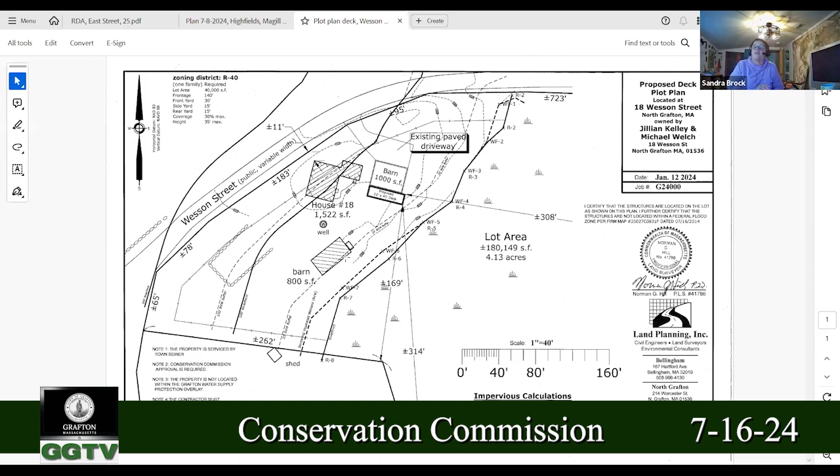I'll move to approve the minor change for— no, that's not right, 18 Wesson Street. Second. All right, we have a motion and a second. Roll call vote—Travis, yes.

And Jonathan? Yes. I am also a yes. This passes as a minor change.

All right, so we are at 7:19. Let us switch to our 7:15 meeting, and I need to go back to the lead sheet and do a public hearing for a request for determination for 7:15, and this is for 25 East Street. So pursuant to the Massachusetts Wetlands Protection Act and the Grafton Wetlands Protection Bylaw, Conservation Commission will hold a public hearing to act upon a request for determination of applicability for the removal of trees on the dam at 23 Rear and 25 East Street.

And who's here to speak to that? Good evening, this is Norman Hill from Land Planning. So, Jan, could you put up that sketch that I did? So, this property is located at 23 Rear East Street. And so East Street runs west to east, and it would be at the bottom of your screen. You can't quite see East Street. The garage is, oh, there you go. So East Street's at the bottom of your screen. So Hayes Pond is at the north end of your screen.

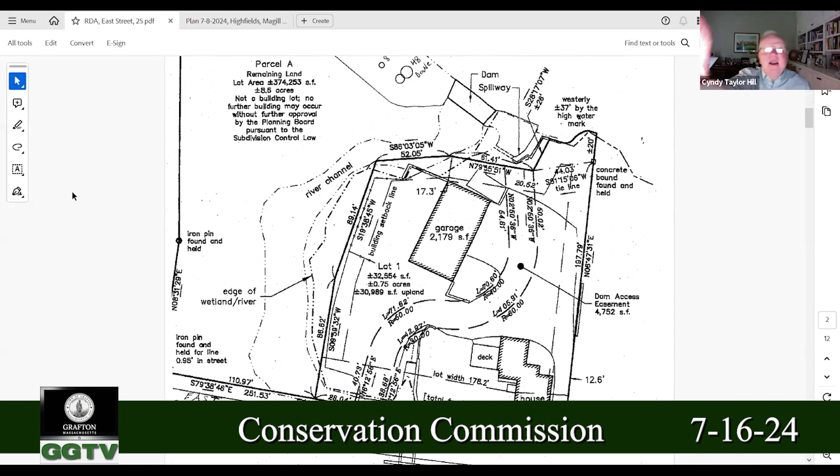So Hayes Pond, I don't know, I'm guessing it's maybe about a 10-acre pond. And there's a dam that holds it back. And so to the bottom right of your screen is all earth, and there's a garage and a house, and it's high ground. And then there's the spillway, concrete dam spillway. And then there's this dam that runs sort of to the northwest. That dam, I would estimate to be about 80 feet long, maybe 15 feet wide at the top. The dam appears to go straight down at the pond side of the dam. And on the downhill side of the dam, it's probably a 1-to-1 slope. It goes downhill to the river and to the BVW down below.

Now, there are trees growing on this dam, so I walked this dam and I've put a circle each place where there was a tree. There's a couple of large trees. There's a 42-inch tree and there's a 48-inch tree, a 36-inch diameter tree. These are big trees. I imagine they've been growing maybe more than 40 years, some of them. So I've shown every tree that's growing on that dam. So my client has received an order from Mass Dam Safety telling him to cut all these trees down. Trees can compromise a dam if the root bundle gets too large. The critters get in there and it could compromise the dam.

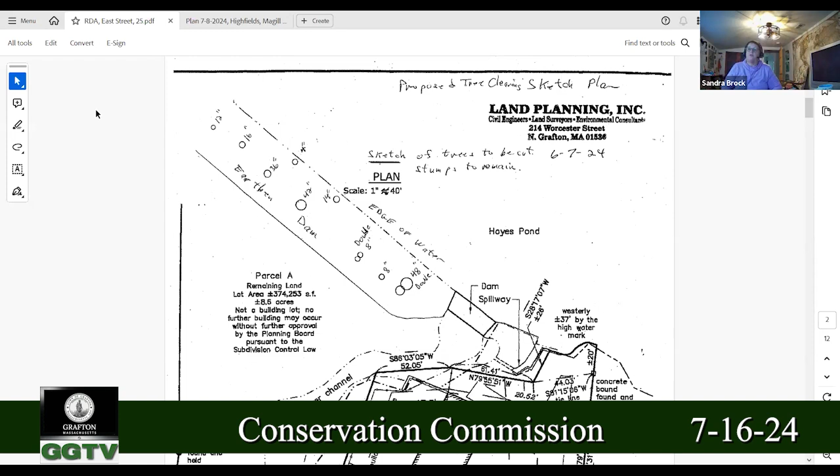Okay, so that's great. Obviously the commission isn't going to say you can't remove these trees when it's a dam safety issue being requested by the state. I don't think any of that's a problem, but we've gotten a lot of feedback from different people with a lot of questions. From my perspective, it's really just making sure that it's done correctly. Now, this is kind of a dam safety issue, so it's not really our purview per se, other than the location of it, which obviously you can see here, and you've already mentioned it's within the 25-foot no disturb zone. I think the bigger question is some of the questions we received.

So why don't we kind of go through those and let you know. We'll start with DEP comments, which Jan, we just got them the other day or so recently.

So I don't know if you received these yet. Their questions had to do with the kind of equipment that would be used to access the area to remove the trees, and whether the trees drawn on the plan are the only vegetation to be removed. Is there any undergrowth or anything else?

Typically, projects proposing removal of vegetation like dams require the root system to be removed, and we'll talk a little bit later about long-term vegetation management. If long-term or continuous vegetation management is possible, that's something we could include as a condition in the NOI for long-term management. I guess another question is, will dam safety be agreeable for the stump remaining?

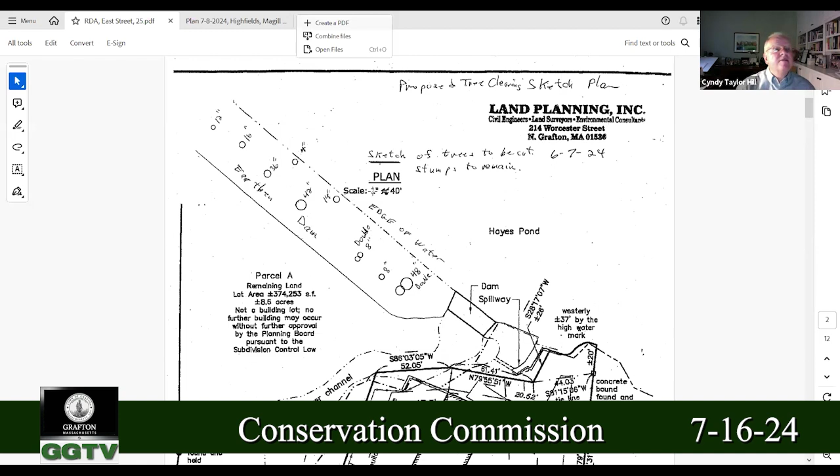All right, Jan, as far as the order of where we want to take things, does it matter? Do I just start at the top? Yep, we can keep going down. Okay.

So this next one is at Highfields, which means Travis, are you going to recuse yourself? I'm recusing myself. Water break? Yep, no problem.

All right, so that's fine. So I will read that in. Excuse me as I move my cat. Sorry, sorry kid. All right, so 42 McGill.

Pursuant to the Massachusetts Wetlands Protection Act and the Grafton Wetlands Protection Bylaw, the Conservation Commission will hold a public hearing to act upon a request for determination of applicability for tree removal at 42 Magill Drive.

And who's here to speak to that? That would be me, Byron Andrews, DiPrete Engineering. All right, you have the floor. Okay, thank you. So if you recall, there were some trees removed by our client, Magill Associates, in an area where they want to loam and seed.

They want to move the golf course further to the right from where it is now. The reason for doing that is they have two building lots that they're developing, and they want to ensure the safety of the future residents by moving the play area further away from their lots. They were not aware that they were as close to the wetlands as they are. So it was determined that we should apply for an RDA for that work.

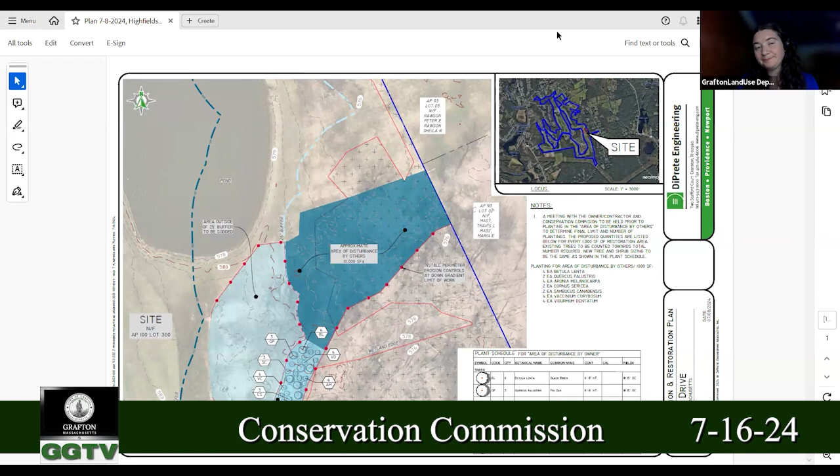Do you want me to make a motion now, Sandy? Yes, please. And we haven't heard anything from the public, Jan? Nothing from the public. Okay, I'll make a motion to close the hearing and issue a negative determination with the conditions that were read out loud prior for 42 Magill Drive, Highfields, tree removal.

All right, and I will second that motion and we'll do a roll call vote. Same thing again. Jonathan, yes. Travis, recusing myself. And I am a yes. So that passes.

At this point, other than that, I would ask Byron to follow up with Jan and Leah about having Art Allen go out when you want to do your plantings. That actually is, I appreciate that recommendation that you made because it makes it much easier for us. And he's the right person with the right background to do that.

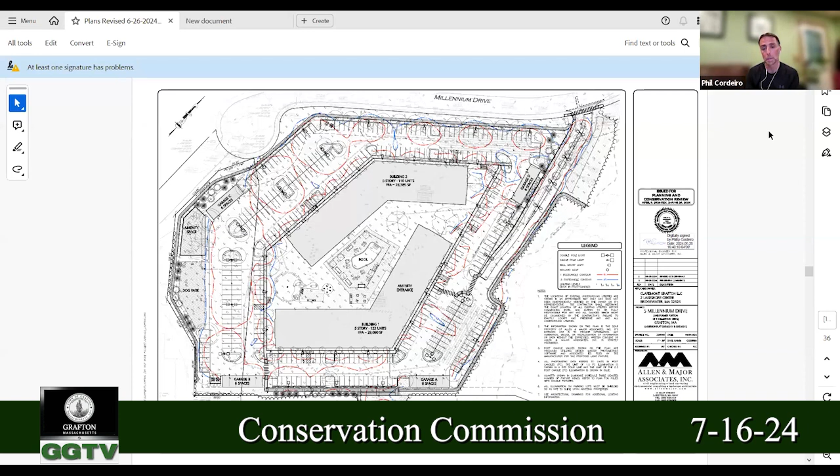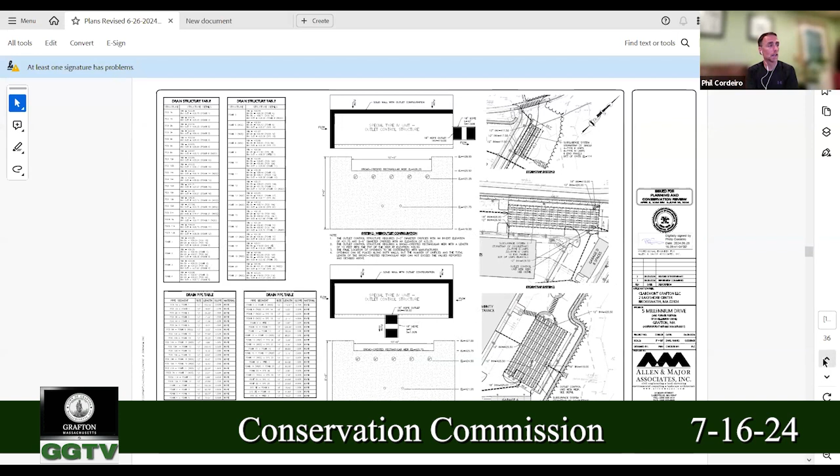Terrific, just getting it for the record and to be a little clearer on that process. Please go ahead and proceed. Could I ask you to back up a couple of pages on the plan set, Jan? I'm looking for the layout plan, which might be two sheets behind here. The layout plan is easiest to see the changes we've made as a result of the commission's comments. This is fine, what's on the screen right now.

When we met with the commission at the initial introduction to the hearing, we had proposed retaining walls along the easterly portion of our site due to the relative nature of the cut and fills. Some of those walls will be in excess of 15 to 18 feet. The commission asked us detailed questions about the nature of those walls, the constructability of those walls, and really to reinforce that we do not need a waiver from the 25-foot no-touch buffer that the town of Grafton has in place. We spoke at that time because we were holding one to two feet off of the face of the 25-foot wetland buffer. We had indicated that we could likely build those with no problems.

But we took the commission's concerns to heart, and we went back and met with our construction team. We also met with the retaining wall manufacturers and reviewed the necessary build areas they would want under ideal circumstances. What we've done here is the entrance to our site, which comes in the upper right corner of the plan - it comes into the site, and we've tucked it a little bit tighter in towards our buildings.

You can see the curvature right as it enters into the parking field. But what that has allowed us to do is pull everything about 10 to 15 feet away from the 25-foot wetland buffer, which has afforded us an opportunity to have 6 to 8 feet of ground clearance from the face of the wall at the lowest course of the retaining wall to the wetland buffer.

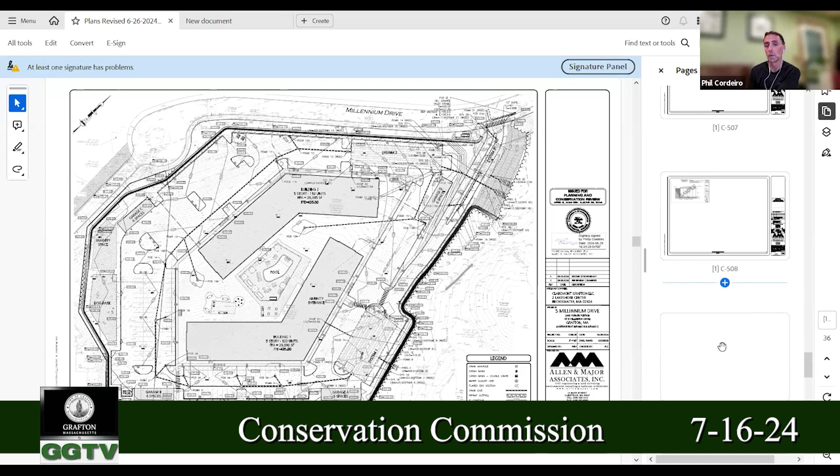They are schematic illustrative cross sections of the proposed finished grade relative to the retaining wall elevations, and certainly the elevations of our stormwater systems located below or adjacent to the retaining wall, to the back of the retaining wall. And we'll see as those come up.

So just one quick question is - please - that you shifted the wall and you described generally it's based on curving the driveway in and so forth. Yes. About how many linear feet of wall, and I'm not looking for an exact number, shifted?

So we ended up actually moving about probably 250 feet of linear wall. I apologize, I wish I could point to it for you on the screen. But basically...

Where, if you're looking along the driveway on the image that's on the screen right now, there are 4 light poles that are centered in the median. From about that point of the 4th light pole, along that entire stretch of the driveway to where it encounters one radius and then a reverse radius as it approaches the parking field, that amount of retaining wall was adjusted to better the separation. Okay, that's very helpful.

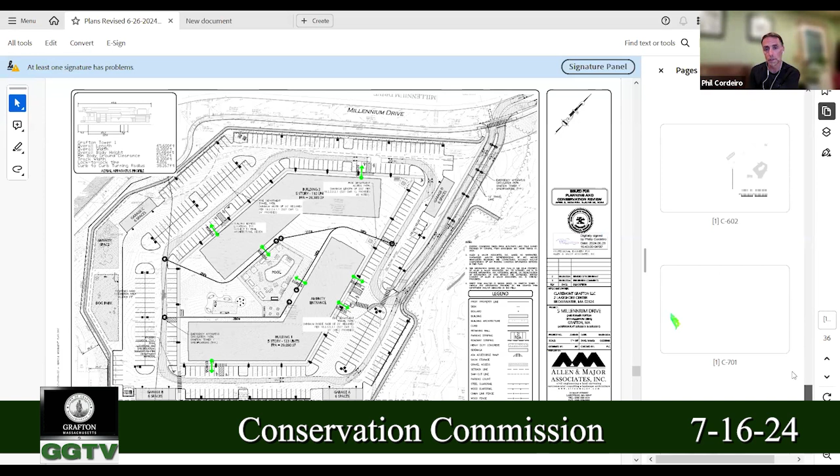Okay. Yeah, so, sheet C601 is the cross-section sheet, please. There we go. There you are.

Thank you very much. So again, on the left, very self-explanatory. Hopefully, I'm happy to walk through it, of course, for the commission. But the intent of these was to really clarify the relationship between the native grade, the proposed grade, the retaining wall solution, the drainage, and everything associative with that area.

And for some granular details, in the event the commission is interested in it, we are looking at doing a Redi-Rock retaining wall here, which is a large gravity block wall. So once we have the base course in place, then those wall blocks would stack up to make the 15, 18 feet of height that we need along this stretch of the property.

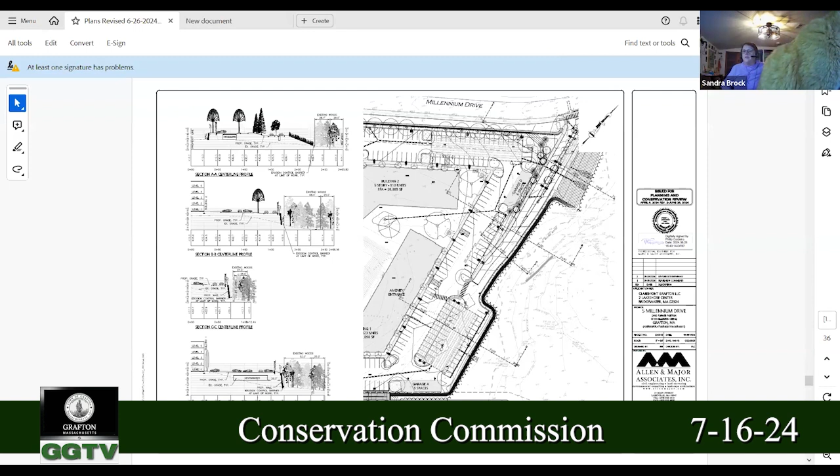So, Jan, if you could just zoom into the upper left-hand side, that first section going through there, and Phil, if you could just generally go through each one of them, just for the clarification of the commission and the public.

Absolutely. So the upper left section is the one closest to Millennium Drive. It does not have a retaining wall. This is the area where we have transitional slope to make up the grade. The darkest portion, the darkest lines at the top of the cross section represent the proposed finished grade of the site, with the thinner black dashed line below it representing the existing grade. And there you might be able to clearly see the amount of fill that will be going into the site to build up the plateau to support the buildings and the development.

The right portion of the cross section is the wetland resource area, along with the wetland resource area buffer line. It's designated by those faded trees, just to give you an indication as to where the wood line would remain and where the buffer zone would remain completely intact. The darkened slope, between the proposed and the tree line, represents that transitional vegetated slope that we are proposing.

If you could just pan slightly to the right on the page, you can see clearly where that slope line is, where cross-section AA runs through. You can see all the lines sort of directly below that north arrow. That's the slope that we're depicting in AA.

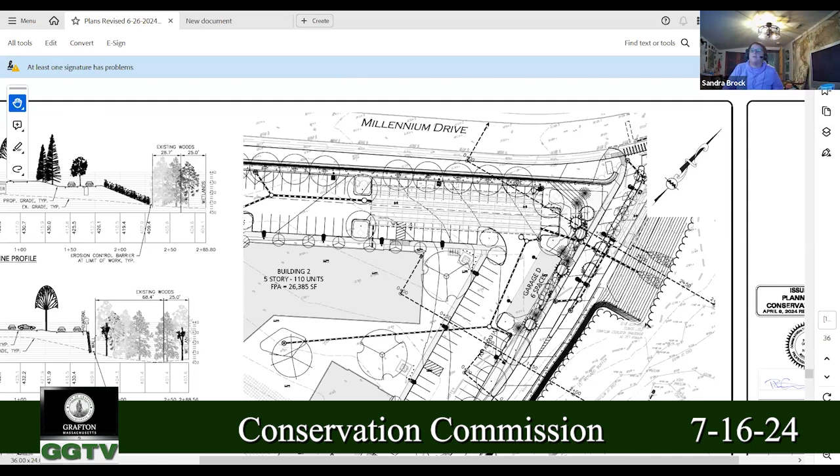If you go over to the top section, and I wish I could mark this up to explain it, there's a manhole right underneath that car. If you go over to the right, to the car on the right, there's a box there—that's the manhole, I'm guessing.

Yes, then what you did is instead of coming up high on the slope, you're coming down lower so that it's more of a flat area as you come out. That's correct. It enables us to keep that discharge pipe flatter and the riprap dissipator flatter still. The combination of those two is the velocity dissipation we're going for.

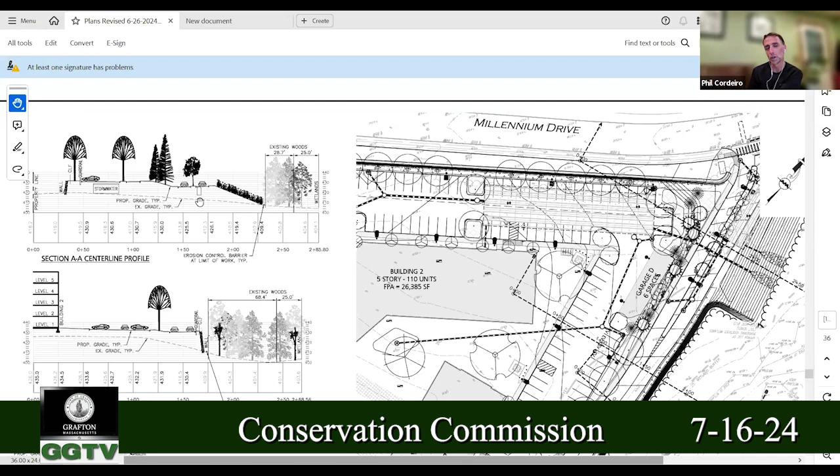And the reason it doesn't show in the section is because the section line is in between those two pipes and those two discharges. That's exactly it—we could try to draft it in, but then astute commissioners might say it's not exactly on the section line, so how do we believe it? That's why it doesn't show up on the line. Yeah, you're right on top of it.

And then going to the next section line, if you want to do a quick description of that—this is an area where the retaining wall moved. Yes, so that's exactly right.

You can clearly see on section BB, again the same general premise: proposed on top, existing on the bottom. The darkened near-vertical line is the retaining wall we are proposing, represented by the thick dark line on the right side of the screen. This one has a very deep woodline section before we even approach the 25-foot resource area buffer, which is about 68 feet as measured along that wood line, plus the 25 feet of buffer zone. So we're able to achieve a very large section through here.

So the wall began its taper right about here. We didn't necessarily need the adjustment here—we actually benefit from the adjustment on the next couple of sections, but this is where that work starts. That's where the adjustment begins.

And then if you just want to keep going to section CC—CC, again, is the shorter one, just a few feet away. What you'll be able to see there, same premise exactly, is at the base of the retaining wall on the section.

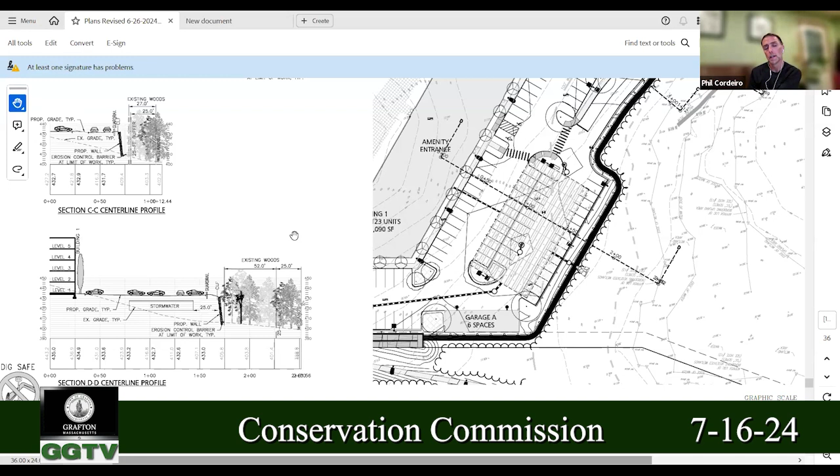If you're able to zoom in on it, you'll see that we're maintaining that 6+ feet from the base of the wall to the face of the native wood line that's going to remain on section CC. And then that same premise is actually going to carry forward to section DD, with the same beneficial 6 to 8 feet.

And I keep using the term 6 to 8 feet because it does vary a little bit as you're moving along those lines. The minimum clearance for us is 6 feet. In some areas, we achieve 8 feet or a little bit greater through this pinch point area. And then obviously, as you go closer towards the street line, the buffer falls away from the development and we achieve greater separation distances.

Please continue with your presentation. So I don't have much else. We're pleased to provide these changes to the commission because we think it addresses a concern that was very well voiced, and we're happy to respond to them.

I believe the Graves Engineering Review letter from last week, the beginning of July, notes that we've satisfactorily addressed his stormwater concerns, hopefully weighs on the minds of the commissioners relative to the stormwater management permit, and ultimately the order of conditions here. Those are our updates, and I guess I would turn it to the commission for any questions that I could answer for you.

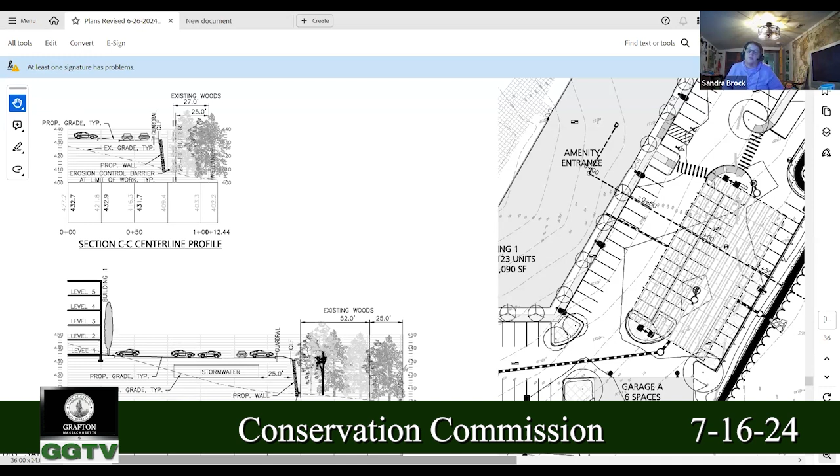All right, so first we'll go through and ask the commissioners to see if they have any other questions, specifically on some of the updates and just generally other questions. I'll go through the agent's report, and then we will obviously open it up to the public for any questions they may have or any comments they'd like to express.

So, Jonathan, any other questions on the direction of where the plans are? No, I thought that was pretty clear. All right, Travis. No other questions from me.

Okay, I'll just go through some of the comments from our agent's report. As discussed last time, the commission has a policy of not disturbing more than 5 acres at one time. That's based on prior experiences, not good experiences, and it's just a way to minimize the area of what's exposed to then minimize the actual potential erosion control issues that you may have.

The applicant has requested a waiver from that, and they'll need approximately 7.5 acres. The reason why, as was previously indicated, is because this is such a large cut fill site. To try to do it in 5 acre increments, you end up having to manage the soil and maybe possibly take it off and bring it back on. By allowing the entire developable area as shown on the plans at 7.5 acres, the whole idea is that you move the soil within.

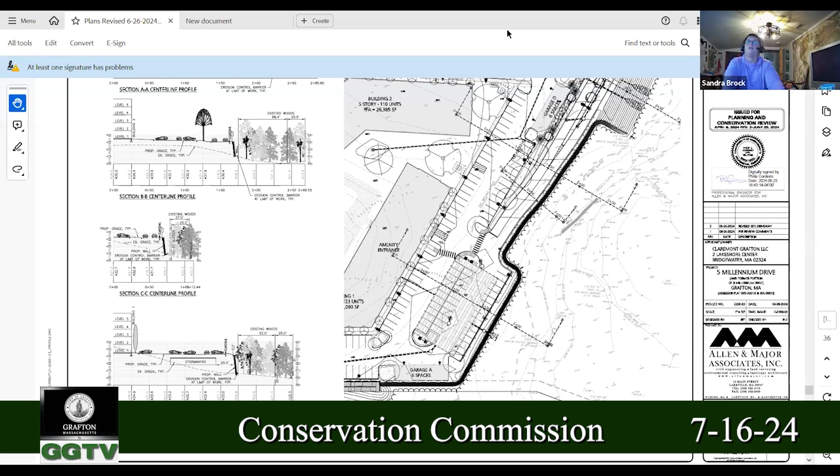Prior to the commencement of work, a stamped design for the retaining wall shall be provided, and it will be reviewed administratively. Prior to commencement of work, a signed illicit discharge statement shall be submitted, which will also be an administrative review. All right, having said all of that, do I have a motion?

I'll move to close the hearing for 5 Millennium Drive, issue the permit with the special conditions as discussed. Second. A motion and a second. Roll call vote: Travis, yes. Jonathan, yes. I am also a yes. The motion carries. Good luck. Thank you very much.

All right, Jan, keep on rolling. Okay, so we are back to 98 Worcester Street.

Pursuant to the Massachusetts Wetlands Protection Act and the Grafton Wetlands Protection Bylaw, the Conservation Commission will hold a public hearing to act upon a notice of intent and application for a Grafton Wetlands Bylaw permit for the repair of a retaining wall at 98 Worcester Street. And who is here to speak to that?

Robert Sims, 111 Fowler Road, Northbridge, Mass, with Comprehensive Environmental, representing the Grafton Water District. You have the floor. Thank you.

So I'm not sure if Jan got this today, but we received an email notice from Central Region with the DEP number. I didn't recognize all the emails — there was 'Concom Grafton' on there, I assume that's you, Conservation Grafton. I just want to make sure you guys got it before I start talking about it. I did not receive the DEP number. Let me see if it went to another inbox, but I haven't seen it. Yeah, that's one of our comments — we're still waiting for DEP and their comments.

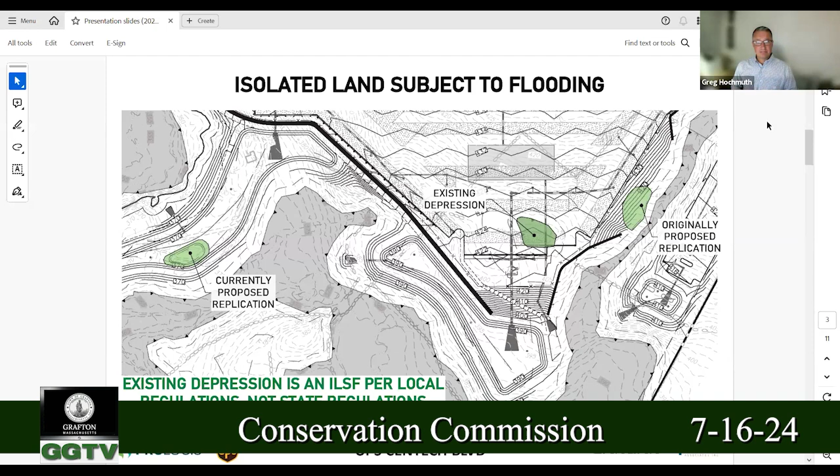John Perry, with Langan, site civil engineers for the project.

Along with a few DEP comments, we also got some questions from this commission last time we met in June, and we want to run through our proposed procedures to answer those questions and what we will be submitting, just in case you have any further comments before we formalize that.

I'd like to mention too that we received a peer review letter from Graves Engineering through the planning board. I don't know if the planning board shared that with the commission, but we do have it. I think the comments are fairly minor. They confirmed that we're meeting all the stormwater standards required, with just some clarification and some minor things, crossing T's and dotting I's, if you will. So we do plan to formally respond to that as well.

So the first thing I wanted to address, which we heard last time - if you can go to the next slide - was that we were asked to look at additional low impact development design techniques. We've done that, and we wanted to present this before going ahead and redesigning something, so we could have a conversation about it and get your feedback.

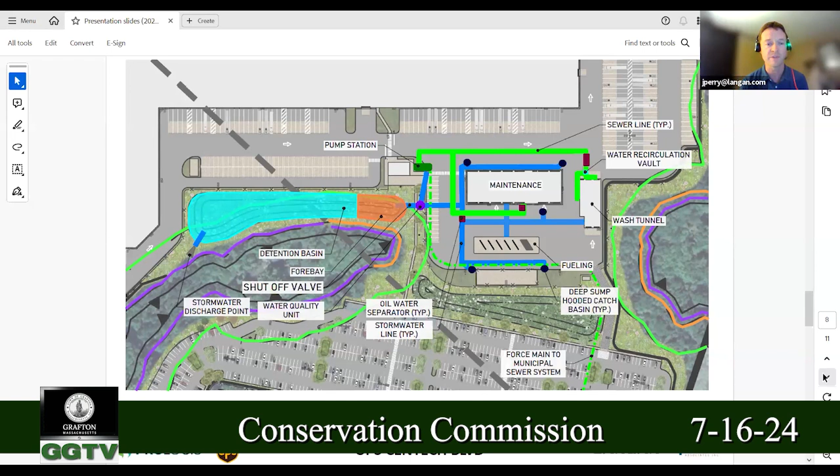And the thing that we've added is a shutoff valve. So just downstream of the water quality unit, we'll be installing a shutoff valve, just in case. It's kind of the last line of defense here. If there was some type of spill and it somehow made it through all those first lines of defense, there'd be a person trained in operation and maintenance of this area specifically who could shut that off. Next slide, please.

So this is a plan showing the snow storage areas. I believe last time we talked more in high level terms about the plan for snow storage. We do have multiple locations strategically located throughout the site so that we aren't just trucking or pushing snow from one far corner of the site to another. So to the extent we can, we've located dedicated snow storage areas. All of those are graded back towards the parking lot or where the drainage system is.

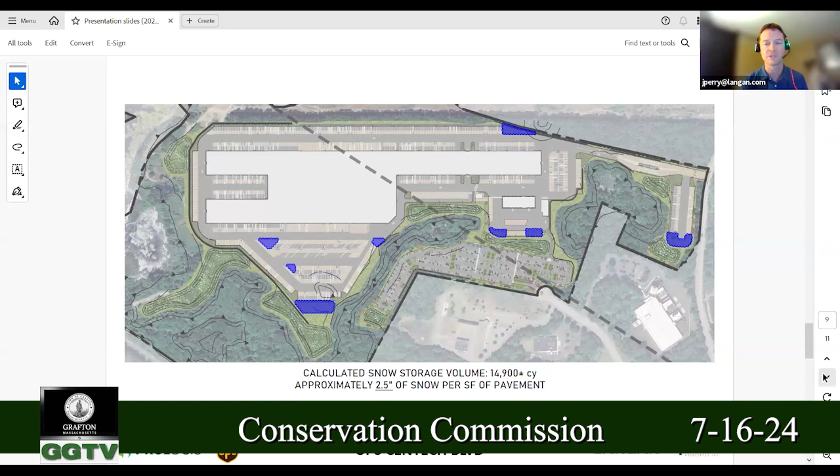And we ran some calculations on these areas and came up with about 15,000 yards of snow, which is a pretty good amount. And over the area of the paved surface, that would be about 2.5 inches of snow, which is fairly typical. Next slide, please.

Okay, so there was a question about basin access, which was somewhat combined with a comment about the gravel road that comes off of Parmenter Road, to the bottom left area of the plan here. There are a couple of culverts that extend underneath the gravel access path. And there was a comment that if we intended to use that for access to the site for basin maintenance, that we should look at possibly upgrading those or replacing those.

And we've looked at basin access in more practical terms as well. It's always better to be able to access it from the site anyhow. So we did grade in a basin access pathway from the site area, from the truck staging area to the basin, so we can access all of those, so that someone on site could come in, check in with security, and get a vehicle down there a little more easily. It's closer to the point of maintenance. Next slide, please.

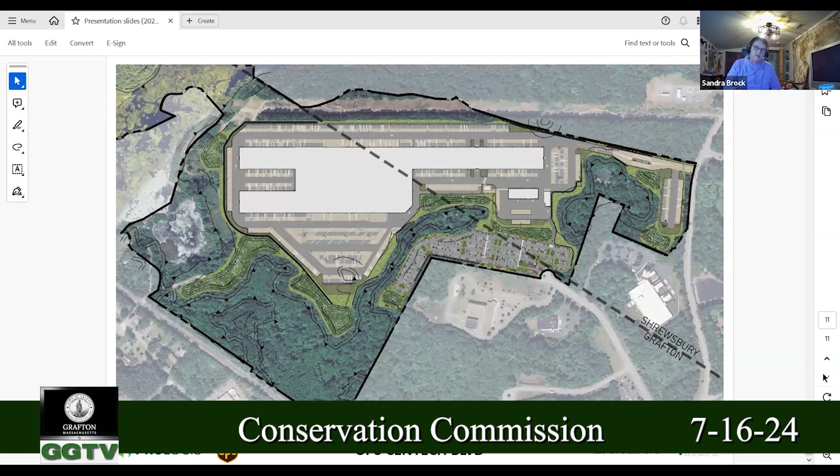If you could go back to the slide with the images on it for green infrastructure - that one right there. So I have a question. You're showing on the porous pavement that the parking spaces are what's porous, and the maneuvering aisle is non-porous.

That's traditionally done because of the amount of tire turning and sediment within the drive aisles, and tending to the porous pavement within the parking spaces where cars pull in and stay there. I'm just curious why you're not doing that approach that you're showing in this photo on the plans.

If you could go back to that zoomed in plan of that - yeah, exactly. So we are doing that in the more northern portion of the parking lot there. We are going to have that strip along the parking. So everything kind of grades that way.

There is another valley somewhere within there, but a good portion of that lot does grade towards those parking spaces. But if that area is graded towards that orange, if you had all the parking spaces as a porous pavement system, you'd be decentralizing the infiltration location, which is a much more green infrastructure approach - to have the water go into the ground where it falls, as opposed to collecting it in a relatively small percentage of the overall imperviousness.

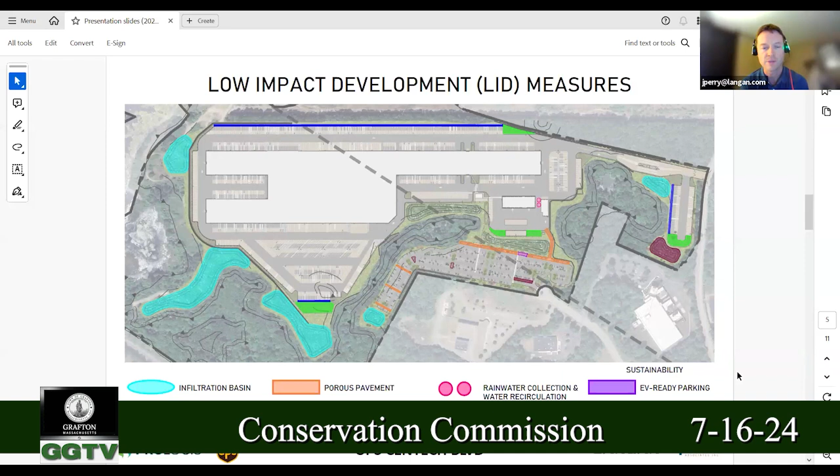In that area, again, it's flat. I don't think we'd have any problem getting adequate hydrology. But as I mentioned, we'd have a secondary source of hydrology below that emergency outlet control structure for that detention pond. If you zoom into the next sheet that blows up the parking lot, you can see that a bit better. It's that lighter green color to the right of the dark green wetland that creeps up to the left. There's a little nook in there that we could propose it.

So it's kind of tucked in between there, there's an employee walkway, a pathway in the wetland. That little open space there where the town line goes right through it. That seems a little bit more applicable. And this would be more of a traditional wetland that we'd be creating, not just a low point in the woods. It would be more like your typical isolated vegetative wetland.

Those are my concerns, no other questions, Sandy. Okay, I have one really quick question, you may not have this determined yet. When you talked about doing the snow storage as stabilized grass, which I certainly have no problem with, do you have an idea of what system you would be using?

I don't have the exact product in front of me right now, but it would be one of those waffle type plastic grid type units. The only reason I'm asking is I'm more concerned about a happy snowplower ripping all that stuff up. I've seen that, there's lots of products out there, and there's definitely things appropriate for that. It's just a consideration, less on our part, more on the owner's part and how often they have to replace that.

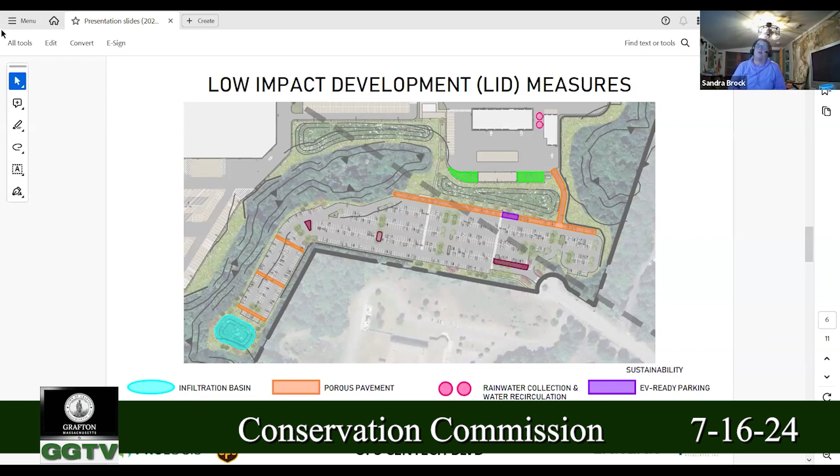So Travis, anything else, last parting words? Nope, nothing else. And Jonathan? Nope. I don't have anything at this time, so if you could just request that continuance, we will do a motion. Yeah, we'd like to request a continuance to the next hearing, please.

Okay, do I have a motion? I'll move to continue the hearing to August 13th for Centech Boulevard. Do we have a second? Got a motion, a second, roll call vote. Travis, yes. Jonathan, yes. I am also a yes. This hearing's been continued to August 13th.

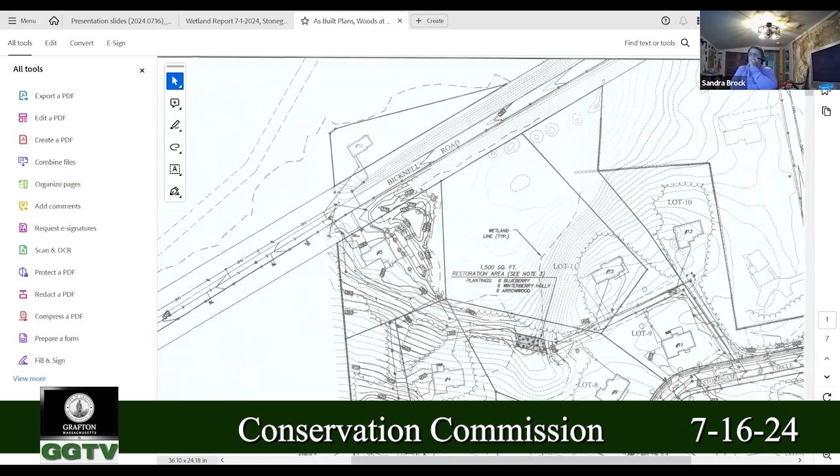So we're looking at lot 1 down here. Okay, right.

Let me quickly go around the commission and get their gut reaction. What I'm seeing there is the crosshatch is what was filled, correct? Yes, and then the other area of replication is further back. So, this is a time when they were doing it truly one-to-one, and then there's some sort of condition indicating 30 feet of natural vegetation, which based on this subdivision plan would be right at the back of the house. So, Travis, any comments or questions?

So what we're looking at is not the plan associated with the original permit, correct? This is the as-built plan. We have it but not in the digital file. I guess I'd want to double check that the hatched fill is what was part of the original permit, right, and not just what was built. Well, the as-built has to comply with the requirements. But what you're saying is it'd be good to see that this matches that.

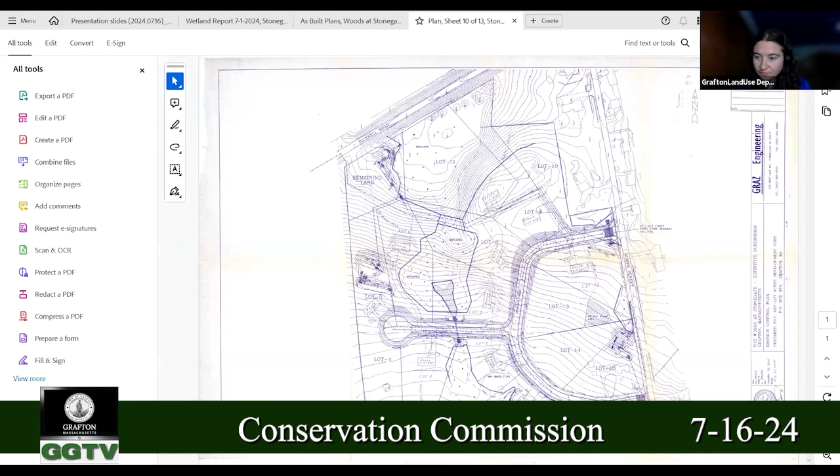Right. And so one of the things I just heard, Jan, and you can let me know, is that the homeowner did have a wetland scientist go out and check the replication area, correct? Correct, yes, that was me. Oh, okay. All right, so Brandon went out and looked at where the replication area is.

Correct. And I also GPS located the perimeter of the wetland replication area so we could get an exact size. And we came up with a size. It ended up being 1,756 square feet in size.

So this is the original subdivision plan? Yeah, there we go. I believe so. I'm glad you have that. Thank you.

So may I? So in this plan, there's a dash line, and then you can see the hash is the wetland that was filled or approved to be filled. But if you look at that limit of work with the erosion control line, that is not 30 feet away from the wetland line. It's 30 feet from the wetland boundary to the back of the house, not to the limit of work. So this is where I'm having a hard time understanding where this 30-foot undisturbed buffer comes from.

If it's associated with this house, because remember, there's also a second replication area on Fieldstone Court. Or maybe the context was there had to be 30 feet of buffer between the wetland replication area and the upland in the back. I don't know. But it doesn't make sense to me that there has to be a 30-foot buffer between the house and the wetland line, because that's 30 feet exactly, according to the plans.

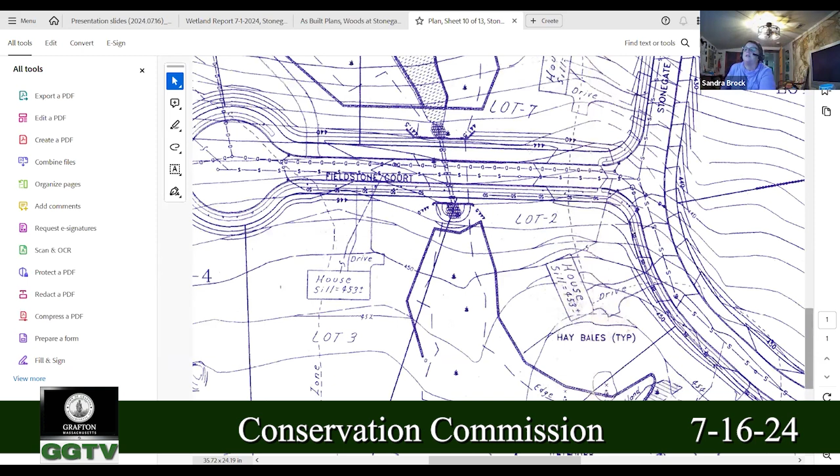So basically you can see the edge of the wetland. It's written on that. And then you have the hay bale line above that, and then you can see the edge of the wetland comes up, does that little area into that lot that's hatched. And then you have what's weird is the hay bale line goes through the wetlands, then stays away from it. And they show a replication area, but they don't show what will be filled.

That hatch is what supposedly was filled. It doesn't make sense that they left that little area of wetlands there because that won't survive, which it hasn't. So, and again, to what Travis was saying, that was 900 square feet, and then now it's, was it 1,700 square feet now?

That's what's actually got built, yeah, because of that area right where it says wetland doesn't exist anymore.

Jan, in her email, wrote that the approved plan shows 1,100 square feet of replication area was proposed, but from what I could piece together, only 5,000 square feet of disturbance was allowed within the whole subdivision. So a change was made to eliminate disturbance at another area, lots 7 and 8, to allow more disturbance and fill at 3 Stonegate Circle. This is why the as-built plan shows 1,350 square feet of fill and 1,400 square feet of replication, as opposed to what was approved before construction commenced, which was 900 square feet of fill and 1,100 square feet of replication.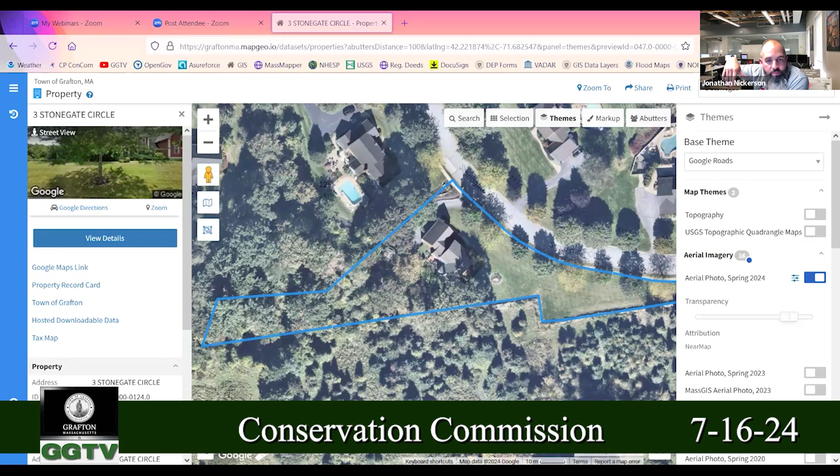Was it replication only the wetland, or was the wetland all the way up to the line? Because again, it snaked up, and they took a chunk of it to put the driveway and the house in. So where it says wetlands past the replication, I would assume that whole area up to where the tree line was behind the house is wetlands, right? Correct.

So per the plan, it would be up against the house. So we're just trying to find the happy medium to allow access to the back of the house and put some signage in. It'd be helpful to have an understanding of what's behind that house now and where the line is.

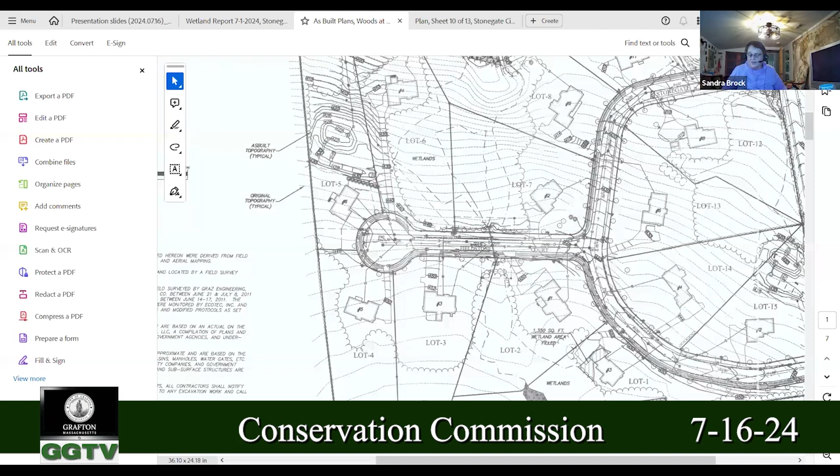I guess if you go to 2019 and 2006, you can see some aerials without tree canopy. Yeah, that's what I was just looking to see if there's alternatives. It looks like it's pretty close.

To the house is 30 feet. There you go, that's about 20 feet.

So the prior owner has dealt with this being wooded or whatever, a mixture of wooded and some grass back there for years. And the house is currently trying to be sold. That's the intent right now? Yeah, that's why this all needs to be cleared, is how this came up.

Okay, I mean, I think, to your point, Travis, something like this could kind of establish where we put the signs.

Yeah, looks like they've got structures or something out there in the backyard. Who knows, could be swing sets, or sheds or something.

Well, the thing is, I took pictures when I was out there, but I can't share them. It's lawn, pretty much straight across the back.

So one thing that would be helpful, Brandon, is if you've got a handheld GPS, that's how you located the wetlands, correct? Correct. If you went out with the same thing to locate the yard area and figure out, is it 2 feet away from the wetlands? Is it 5 feet? Give us that information so we can say, okay, we just want you to put signs here, and then we'll be able to sign off on this.

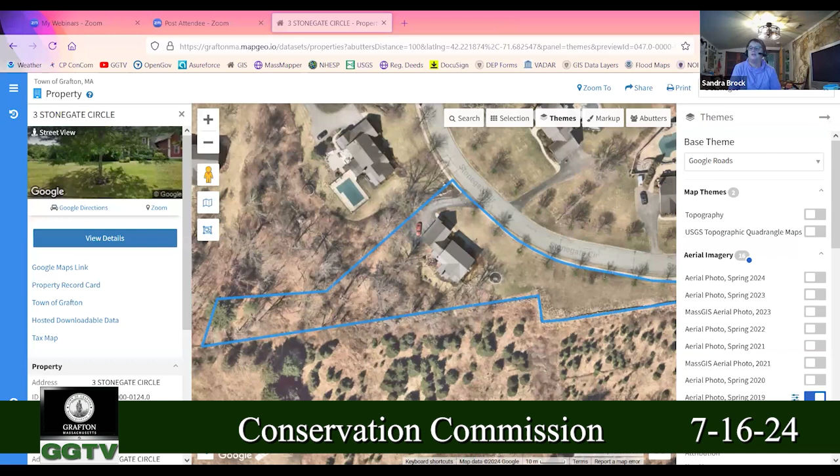This is the most recent. So basically what you're looking at is that the green is kind of the wetlands line. Really what we're looking for is those signs to go across where that brush slash tree line is, and it should go from approximately the property line on the left hand side to past the house corner on the right side, because once it begins to take that turn...

Once it begins to take that turn, it begins to go away from the wetlands, so we're less worried about where it says lot 1. It doesn't need to extend all the way out there. You can see where the wetlands line is, it really just needs to extend to the corner of the house, and that's about it.

Does the other commissioners generally agree with the placement of that? Sounds good. But the signs are installed on what, Jon, a metal T-post in this situation? Yep, the signs need to be all weatherproof and installed on permanent metal posts.

Or can it just be on the trees? It can be on the trees. I just want to make sure that's clear, if trees are the line, right. We don't know. So you want them on a metal post? Will the sign companies in Grafton, without naming a specific one, know the type of post that I need, and do most of these sign companies sell them?